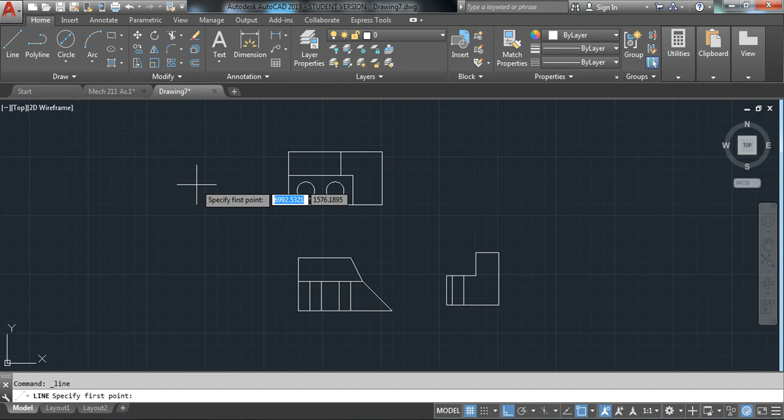To do this, I will start a line. To start a line you can just click here, or as a shortcut you can just do L on your keyboard, then space, and you're already in your command line. So I click here, I will go down 90 degrees.

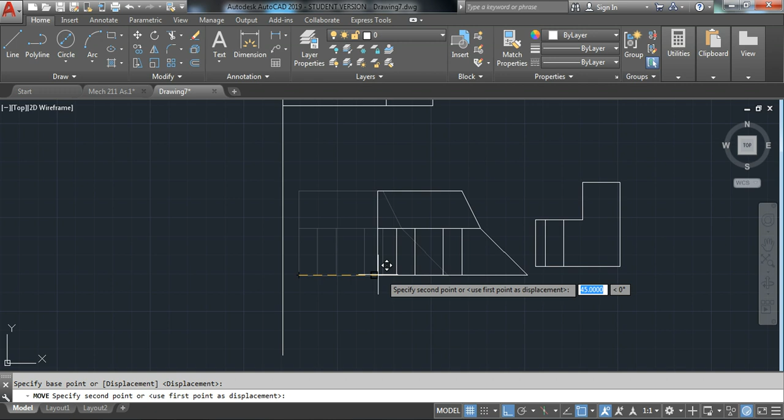Then I'll select my whole view and do right click, move. This is my base point. I will come straight using orthogonal mode on, then I'll put it here, and now I'll delete this line, and now my two views are aligned, and even here they are aligned. Okay, so they're aligned vertically together.

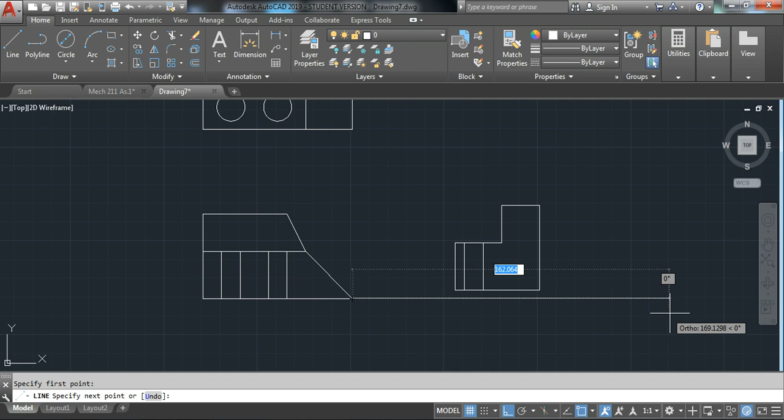Now these two views here, they're not aligned horizontally together. Same thing I'll do, L space, and now I'll start my line, stop it here, or do escape. Then I'll select my whole shape, I'll do right click, move, I'll choose any point, and I'll go down straight to this line. Okay, now they're both on the same line, aligned. Now I can remove my line.

Okay, so that was the first step to do. Check your alignment.

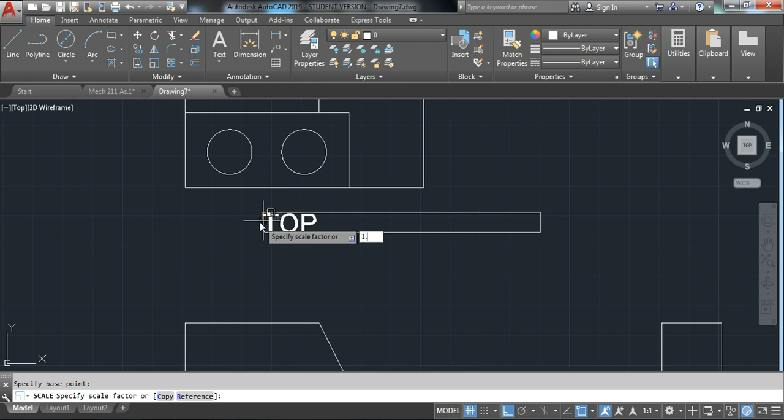If you want, you can just add here as the top view, scale it up, just like 1.5, or to be more specific, plan view, or plan.

Then do right click, copy, so you won't have to do it again. Then remove F8 and copy it here. I finished copying, I'll do escape.

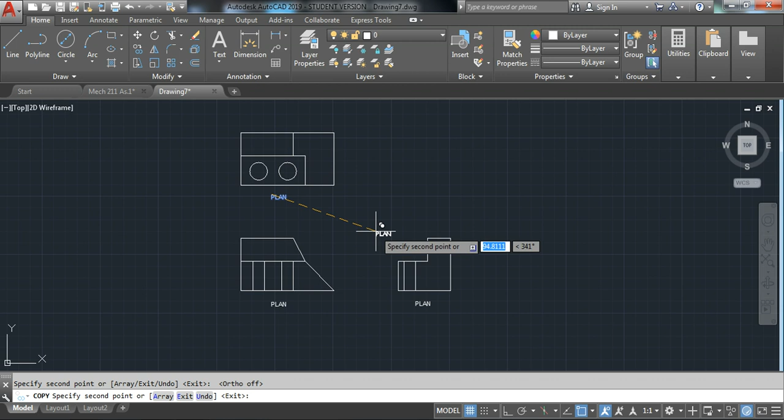Then I'll double click here, just as a front, and double click here, and I'll choose this as right side or side view. Okay, this is optional, but you can do it, it looks better.

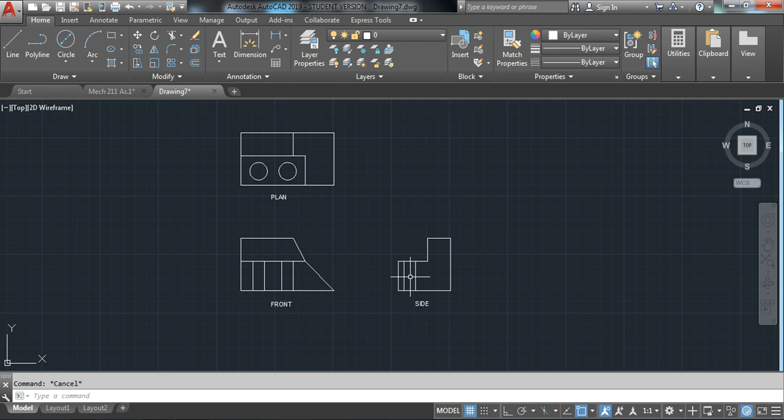So now you can see the student put these two circles. You can see their projection is here. So these are the two circles, but they are hidden here as hidden features, and then they appear here as a hidden feature too. But these two lines are now straight lines, and you want to make them hidden lines.

To do that, you come here near your match properties. You have on your property, it's the third rectangle, it's line type. You click on it, and you can see here in your lines library you don't have a dashed line.

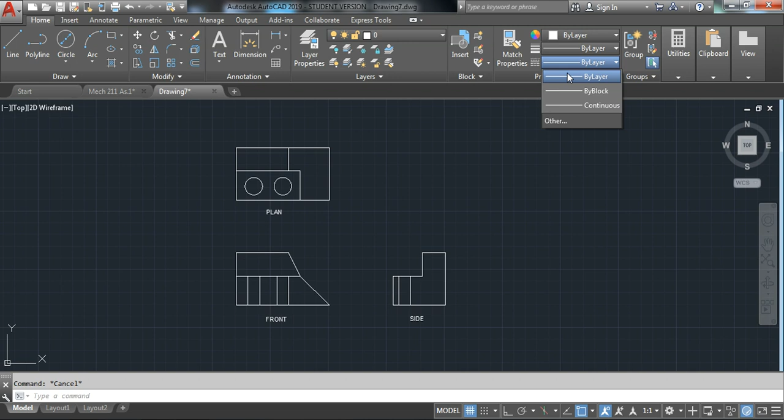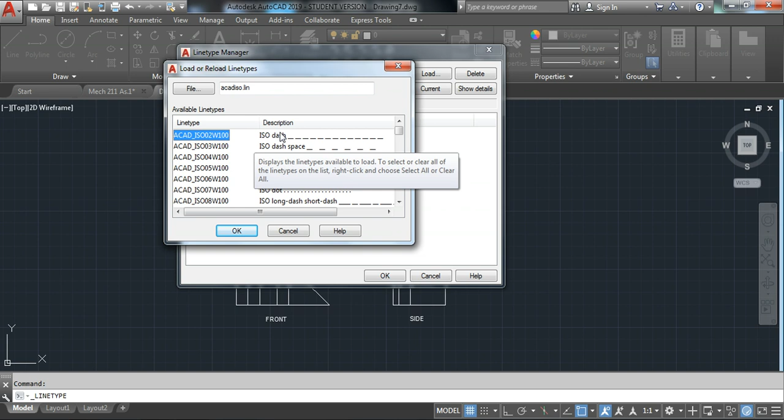So to add a dashed line, you can just click on other, then you click on load, because here on your library you have nothing. You click on load, and then you can choose ISO dash, because if you remember when you first started in the first video, you started as an ISO metric drawing, a metric drawing, like millimeters. If you started as inches, you go and choose dashed from here.

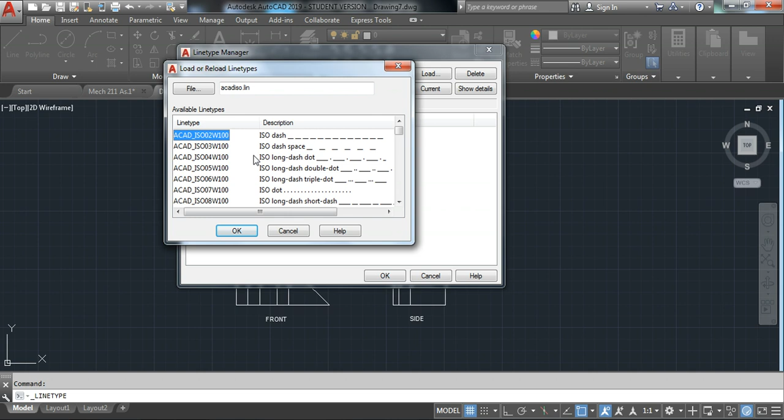This is imperial dashed line. If you want metric dashed line, you choose the ISO one. ISO means metric, so I'll choose this one. I will do OK, it's now in my library. I will do OK.

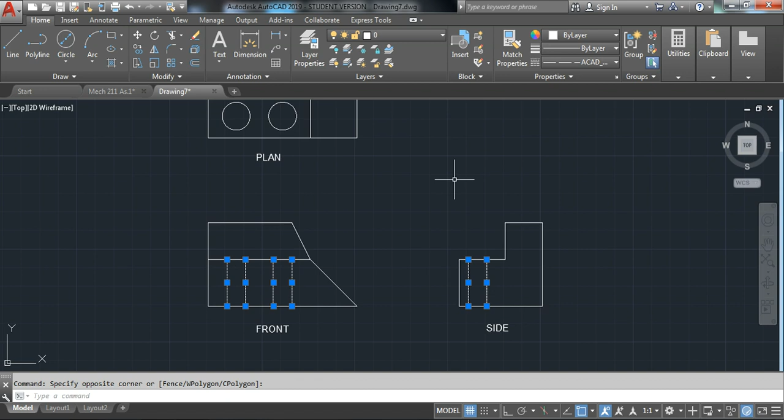Now I can go select my lines that I want to make dashed. And now I'll come here to the third one, and I will choose ACAD dashed line. I'll do escape, and now I have my lines dashed.

So look in here, let's say the dashes are too small and you want them bigger. So to make them bigger, or to change the scale of the dashes, I'll just do escape to clear everything.

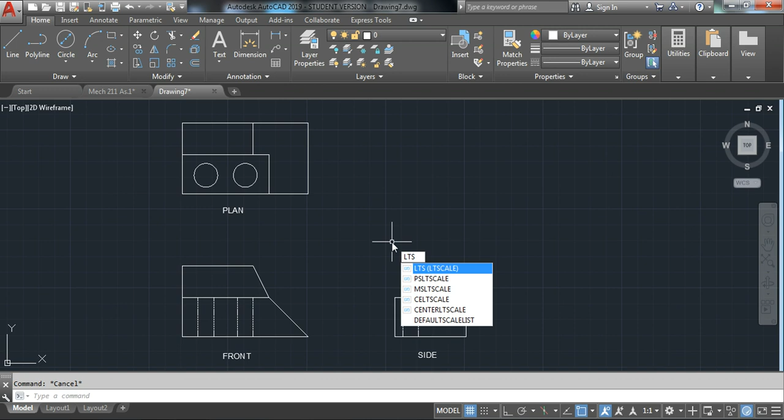Then you do LTS, you type it on your keyboard and press enter, and then you can see your scale by default is 1. So if you want the dashes to be bigger, for example, let's try 5, and you can see they're bigger now.

If you have the opposite case and want them smaller, again you type LTS, enter, and then you can choose, for example, 0.8. Now they are smaller than they were before. So I'll do Ctrl Z to keep the 5 because it looks good here in my view.

Okay, now whenever you have a circle or a cylinder, this circle will appear here as a cylindrical feature, because a circle in 3D space will become a cylinder if you project it down. Anyway, that's another topic.

You need a center line here, because if you don't have one, the person reading the drawing would think it's an edge. He'd think there's a hidden edge somewhere, or something is cut here, and that's why you have hidden lines. So to tell him that these hidden lines are actually for the circle, and to go to another view to see the circle when it's not hidden, you put a center line.

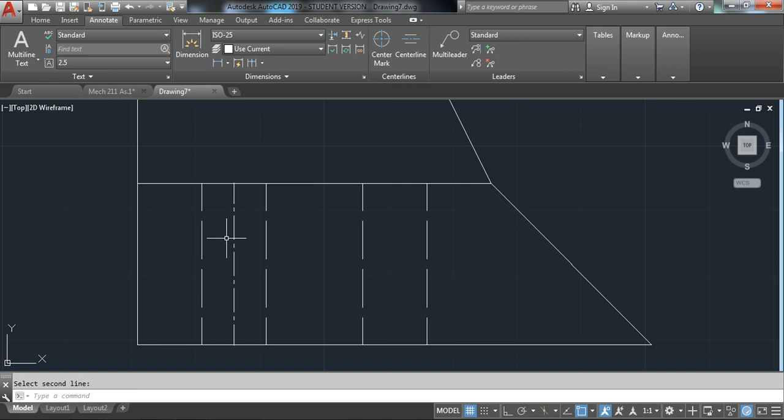To do that, go to the annotate tab, and you'll see center line. Click on it, click your first line, then second line, and you'll have your center line. It's automatically changed to a center line, not a continuous line, so you don't have to select it and change anything, because it's done automatically.

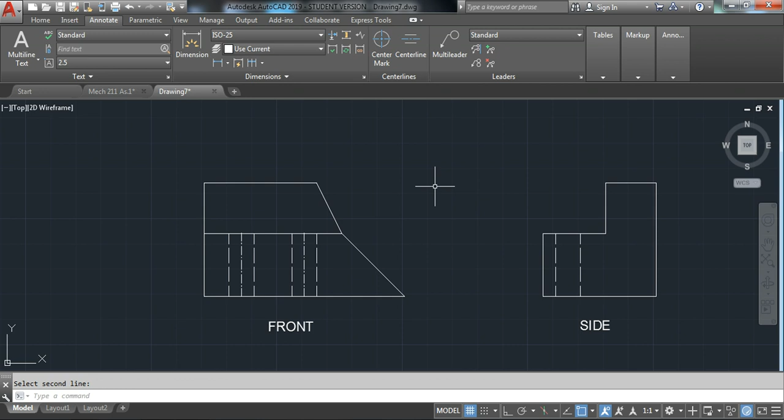Do it again for the other circles. I'll go to annotate, center line, first point, second point, then I have it. As we said, you can press space to repeat the previous command. First line, second line, and then I have my center lines.

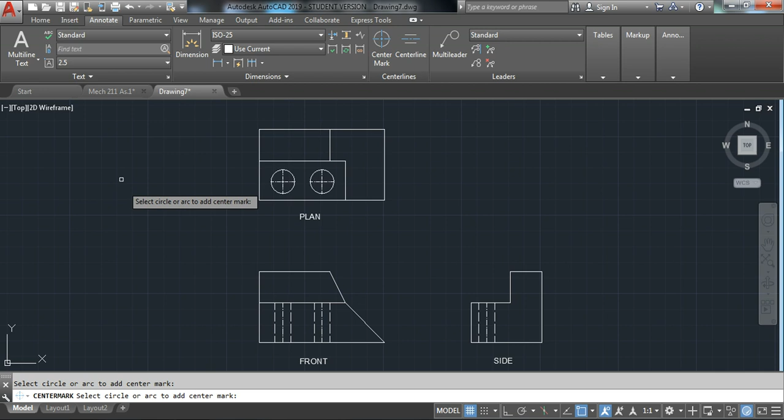Now on the circles I need the center mark. I click on center mark, click my circle, second circle, I'm finished, no more circles, so I do escape, and now I have my center marks. So now my drawing looks better, it's only missing the dimensions.

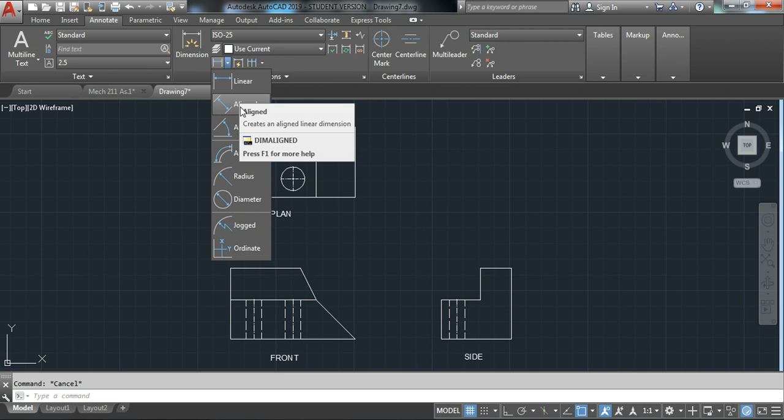To dimension, from the annotate tab you have the automatic dimension, but it's a bit tricky, so you can just choose each dimension by itself: linear, aligned for inclined lines, angular for angles, and radius and diameter for circles.

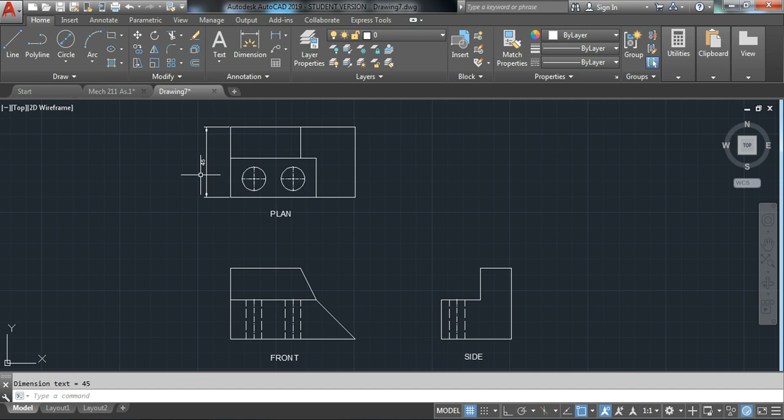Or you can come into the home tab. If you didn't go to annotate before, you can dimension from here. Linear is for horizontal or vertical dimensions you want to add, x and y. I click once on linear, then click this point, click my other point, go right, click here, and you have your dimension. So from this point to this point, this line is 45 millimeters.

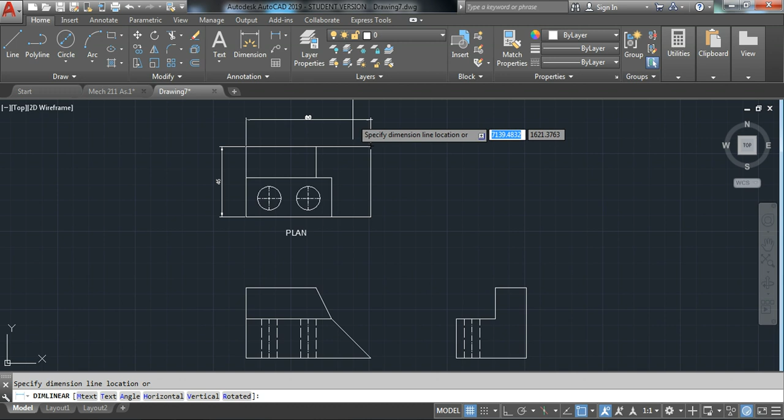So this is for vertical dimension. Same thing if you want to do it for horizontal dimension: you click on linear, first point, second point, go up, click, and then you have your dimension.

Let's say your dimensions are too small and you want them bigger, or you want to change their colors or anything. We have a command for that, called dim style, dimension style. You just type dim style on your keyboard, or you can type it as DIMSTY, then click enter, and you can see here you're using the ISO-25. Just keep it, and then do modify.

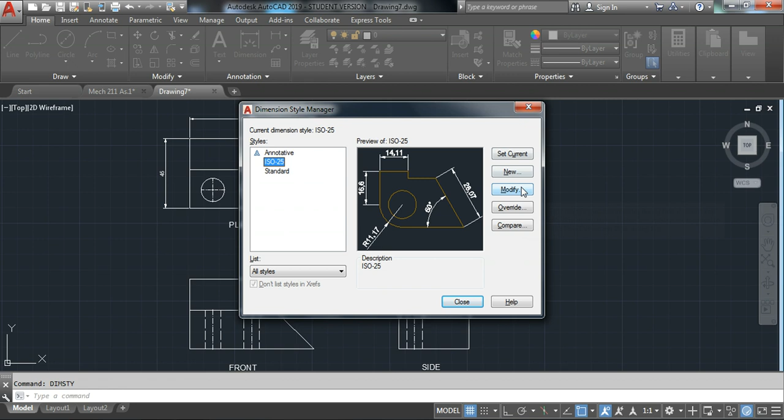Here you can change anything you want: the color, fill color, text height. To change the size of the dimension numbers, you change your text height. Let's say I put it to 4 and enter. You can see a preview of how big they'll become. I'll put it back to, let's say, 3 is good.

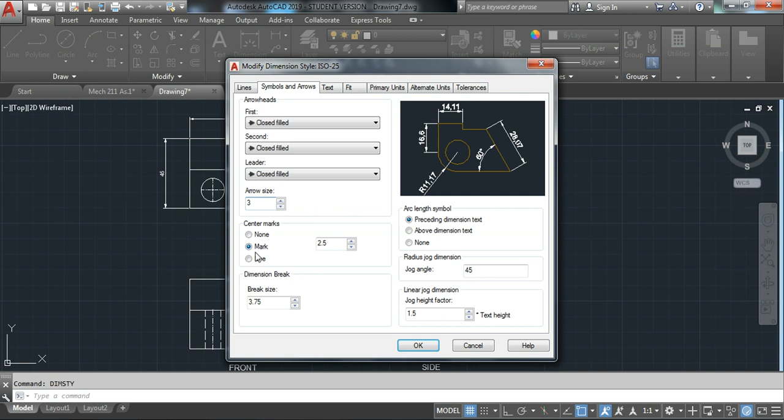Don't forget, when you change your text height, it's nice to change your arrow size too, to the same size. It looks nice, so put it to 3 here, and here you can change your center marks if you want, like the break size. Try changing all these settings and see what they do, but the most important ones now are the text height and the arrow size. So we change them, do OK.

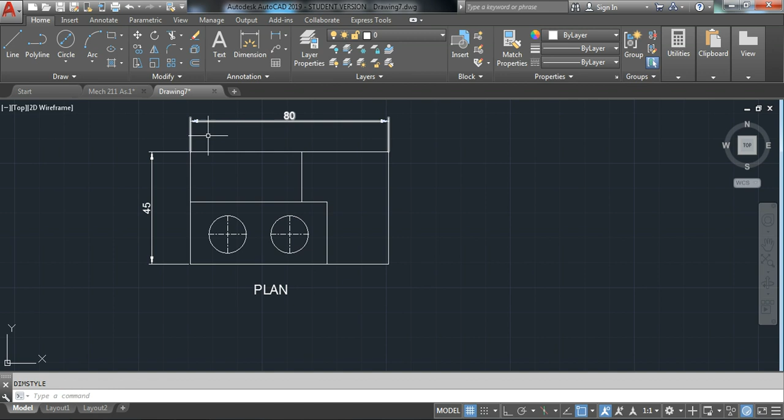Then do close, and they are automatically changed for all dimensions. Okay, I'll do dim style again, enter. Let's say I want to change my color, modify, text color, I'll choose red, and the fill color I'll choose red too. Oh no, sorry, I'll keep it as by layer. The color of my dimension I put to red, and the color of my extension to red, and now it's all red. That's one way to change the color of your dimension.

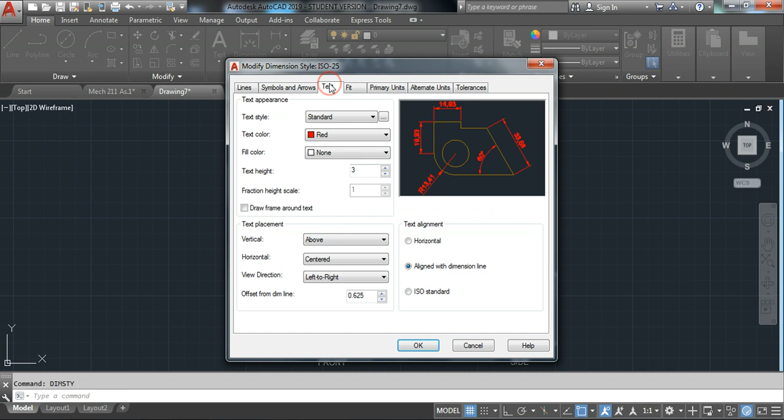It took longer than expected. But another way to change it, you can just do Ctrl Z. Now you can just click on them, go to layer here, and you can change their colors.

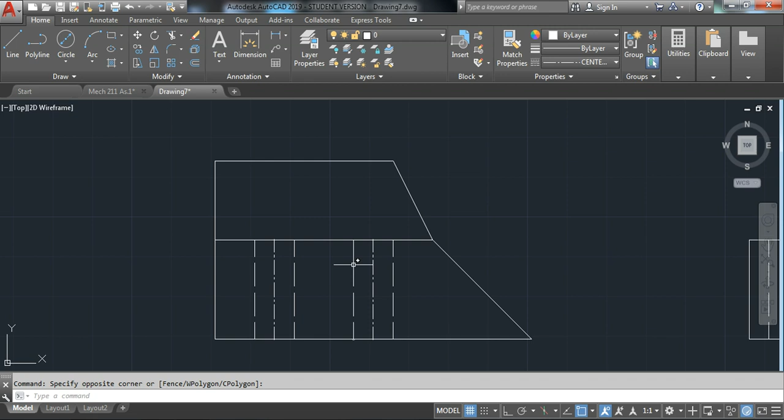Let's change it. It's nice too if you want to change the color for the center lines, the center marks, because actually they don't belong to the drawing. So it's always good to give different colors for annotation things, and keep the main color for the main shape.

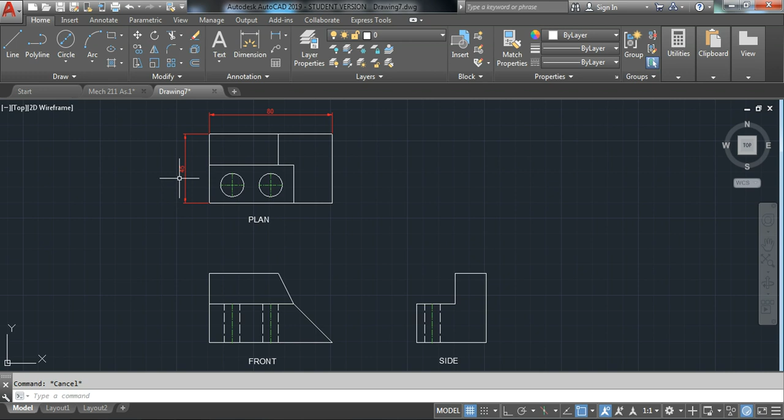Like for lines that are actually on the drawing. So that's one thing, to change the colors, to change the size of your dimension, to change the scale of your dim style. To change your size, you go to modify, text, and arrow, and as we said, you do LTS to change the dashes here.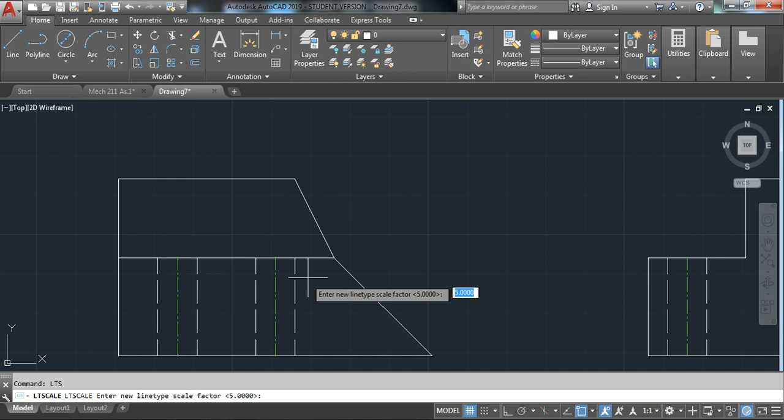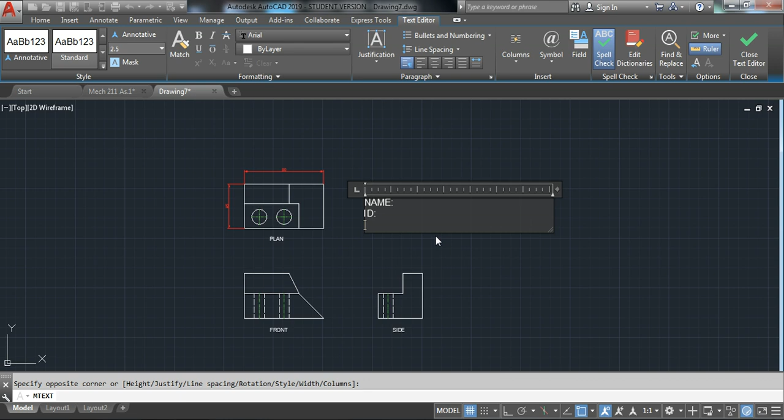And what else we want to do? So let's say that's your drawing, you finished it, you want to submit it. Before that, I'll just do text. First corner, second corner, I'll just type name, ID, section. Then I press outside, click on them, right click, scale, 2, enter, then I have them.

Let's say you finish your drawing, now you want to print it. Let's say you want to print it to scale. You can see here your scale is 1:1. That's your drawing space scale. Actually, you have here layout. So here I'm in my model, I'm in my workspace, right?

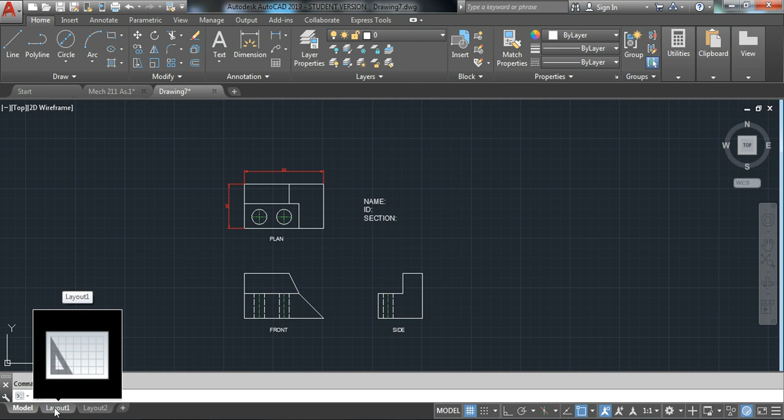When you want to print things, you go to your layout. So I'll click on layout, and then you can see here my workspace, and it's inside like a paper shape. So if I click here on the border, not inside, on the border here, and try to move these points. So if I press F8 now, it's hard to move the point. So if you encounter this problem, just press F8 so your mouse will be free.

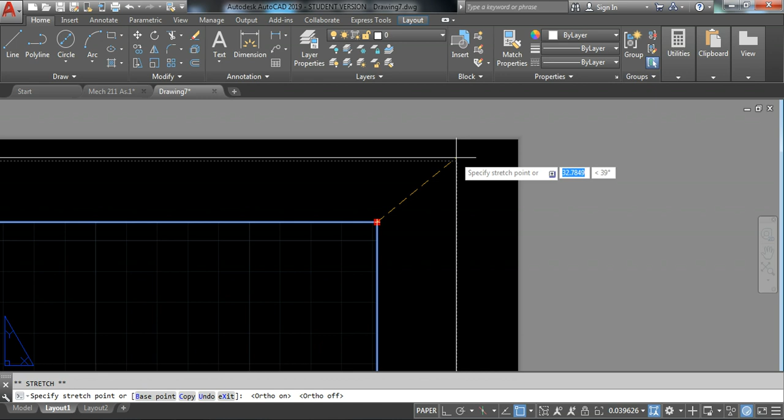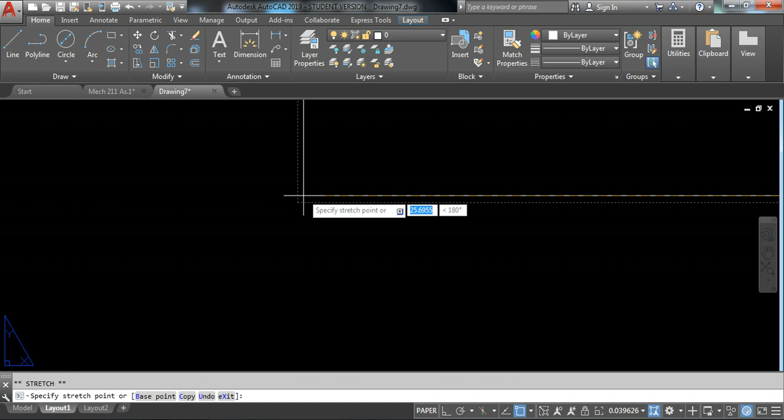Now come and try to match it as good as possible to this dotted line. Do it for all 4 edges. Okay, same thing for here. Again, there may be a faster way to do it. I'm just showing you a way that works. If there's a faster way, do it, good for you.

Okay, so now I'm actually around my dash line. So now you can see my drawing is here. You can see it is too small, and I want it to be like, so that's a preview of your printed drawing. Okay, so if you print it like this now, you will see this shape, nothing is visible.

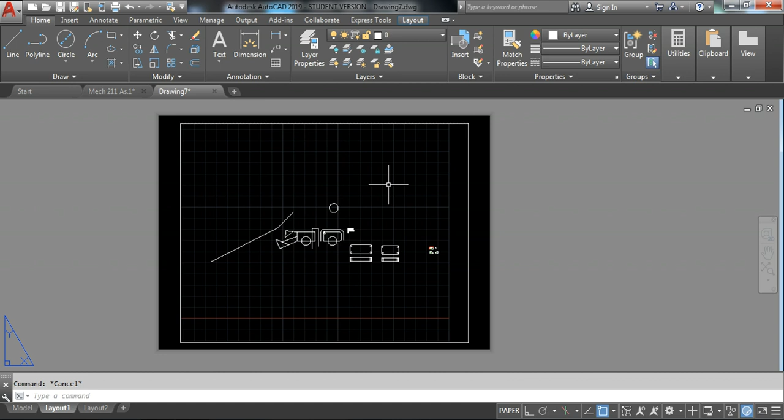So I'll do double click inside here, and now I'm inside my drawing, inside my model space. You can see here it's model. Before I clicked, it was paper space. So now here I'm in paper space. Wherever I move, wherever I do, wherever you draw, even if you want to draw, it's not inside your workspace.

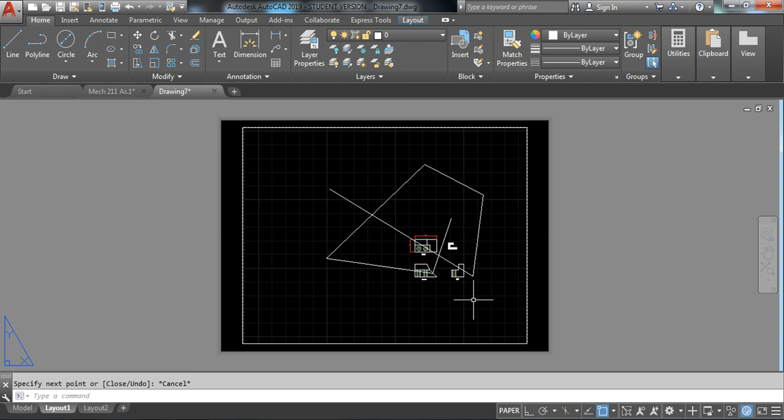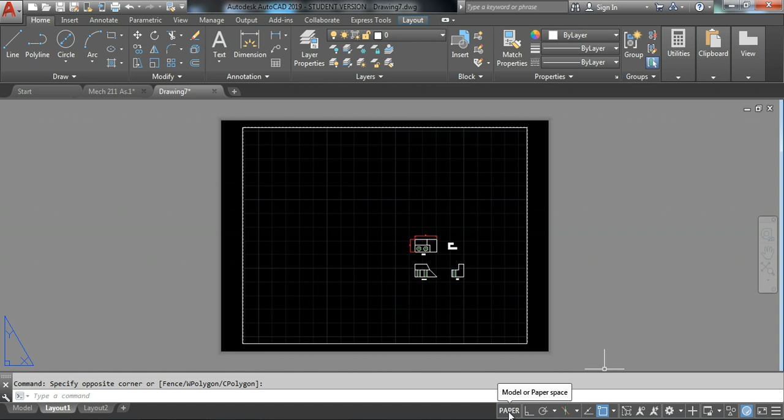If I go here to model, you see you have nothing drawn, but if you go to layout, it's drawn here. So I'll just remove them. Even if you want to select, because you are here in paper space, you're not selecting anything. So again, I'll press on paper. Now I'm switched to my model space.

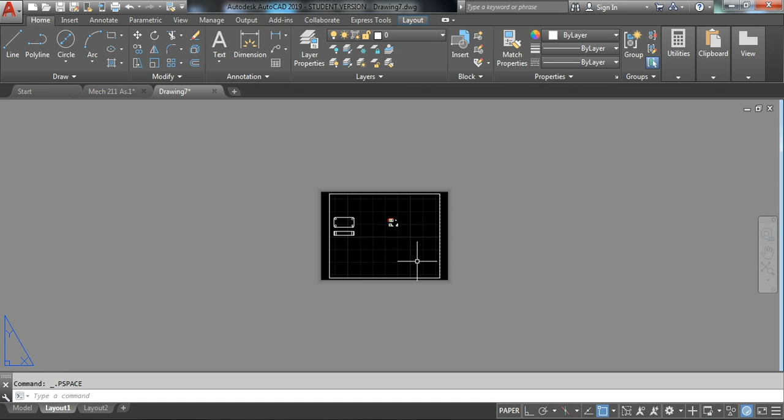Okay, this is very important. I hope I explained it well. So model, paper, you're now in paper. Now click on paper, you're in model. Okay, so now my paper zoom is too far, so I click on model. I'm again in paper. I'll zoom it to a good view. Then I press on paper to go to model.

Now, okay, let's say that's good for me. You can see here your scale is 2.5 something, and actually if you click on this arrow, you can see you have specific scales. I want you to choose one of them. So first start 1 to 1. It's good.

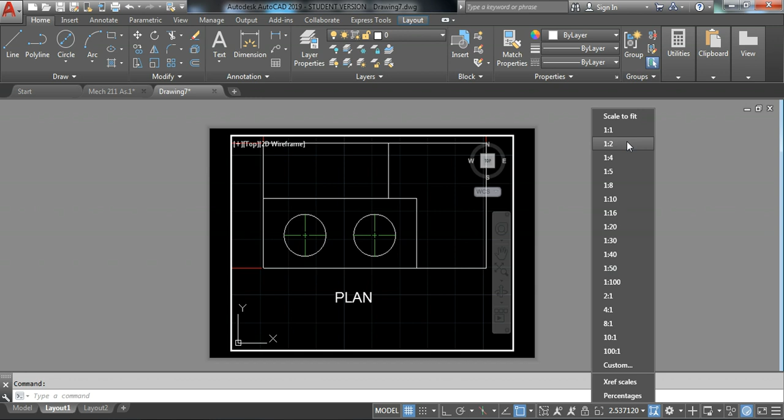Sometimes when you choose 1 to 1, you will get this. So just you can choose 1 to 2, and you get this is too far. So just choose 1 to 1. Move your drawing to a good view. Okay, that's good. Your scale is 1 to 1. You can now switch to paper space, and that would be what your drawing will look like actually. And when you print it, you will get, when you measure here, you will get 45 millimeters. It's 45 millimeters actually on your drawing, because here your scale is 1 to 1.

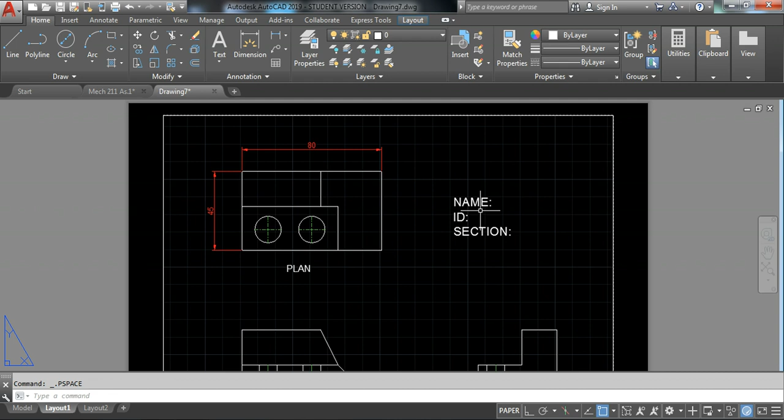Now let's say you did this, everything's fine. You want to add your name. You can just go without messing with your paper space. Just go to model. Now you can do whatever you want. Even you can change lines wherever you want. Name. Add my name, for example. Okay, finish editing. You can go to layout, and it's already done for you.

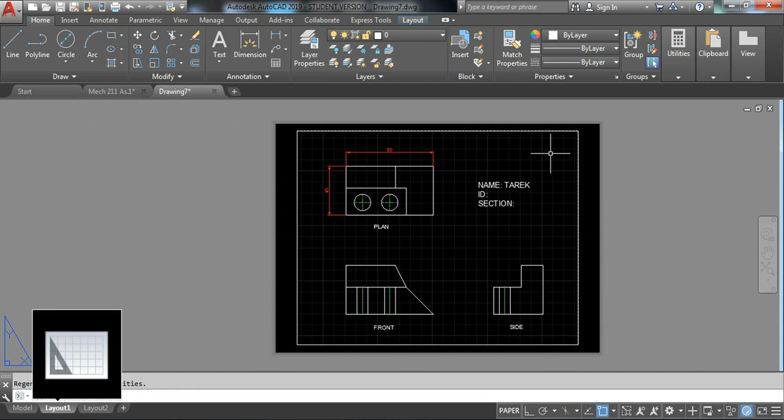So now to print it, you can press print here on this little printer, or you can do Ctrl P on your keyboard. If you get this, just do continue to single sheet.

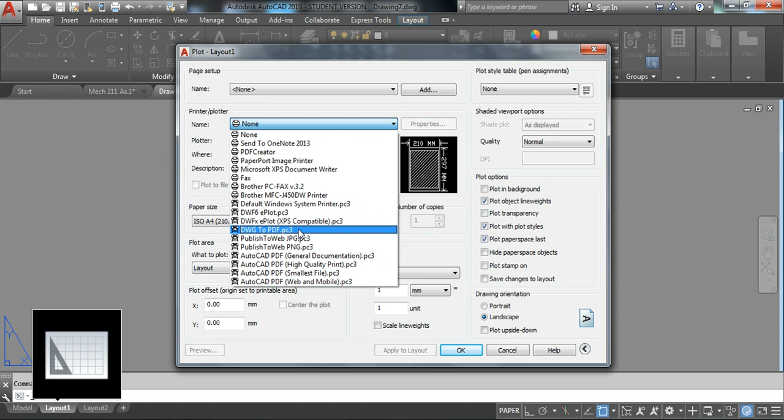You'll get this dialog box. On printer plotter, choose - if you want to go to as a PDF, you click on this DWG to PDF. If not, you can choose your printer. So it doesn't matter, whether you choose DWG to PDF or your printer, then you can continue, it's the same.

For paper size, I prefer for drawing, for PDF, or for your printer, just choose the letter size, which is 8.5 by 11. That's the size we'll use every time, okay?

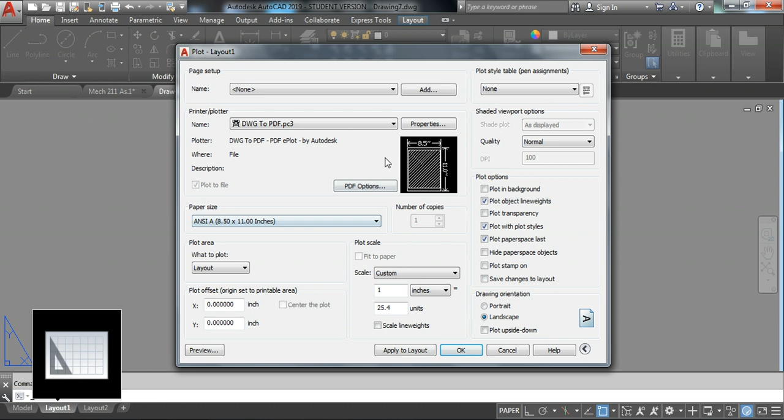And now you come to what to plot. It's asking you what to plot, so I'll choose window, and then it will take me here to choose my window. So I'll come here and I'll choose the corner and the other corner.

I'll do center the plot, I'll check this one, and I'll list this for my scale. I'll do 1 to 1. This is in millimeters, 1 to 1.

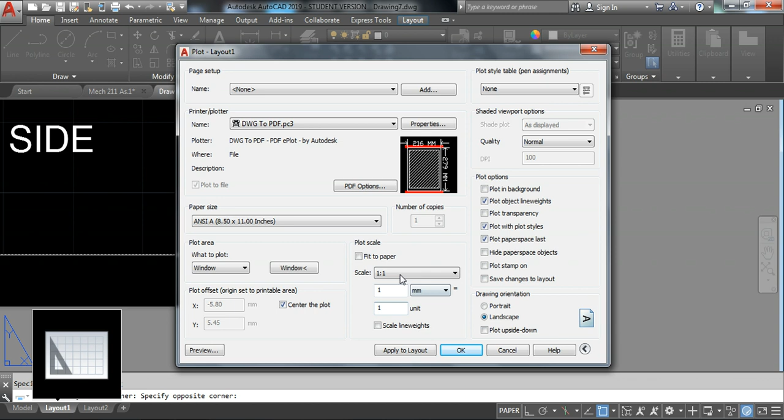And then I'll do preview, and you can see your drawing. You may not have this produced by student version - doesn't matter - but you can see your drawing is good.

If it's good, you can just press on plot, and then it will take you to this dialog box to save it. You can save it anywhere you want, so you can email it to me, and you can choose your name.

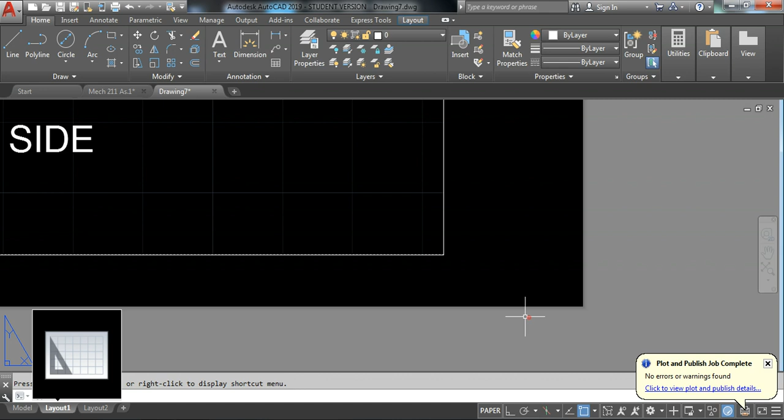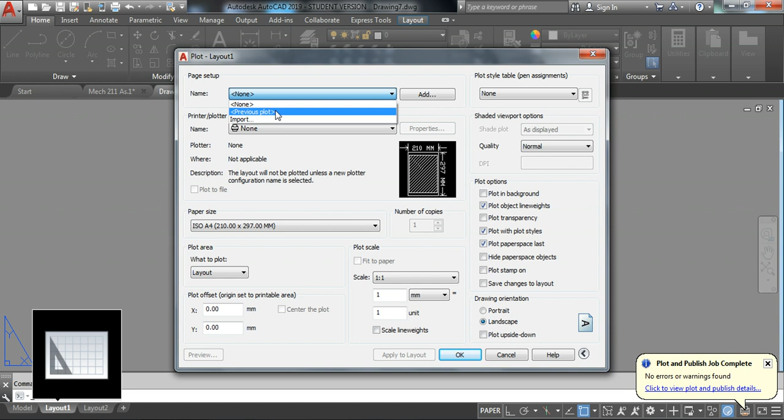If you do cancel, I'll do Ctrl P or print again - let's say you went out to change something, then you went back to your printing and you don't want to put your settings again. You can just click here on page setup and do previous plot, and you have your previous settings here. That's easier and faster.

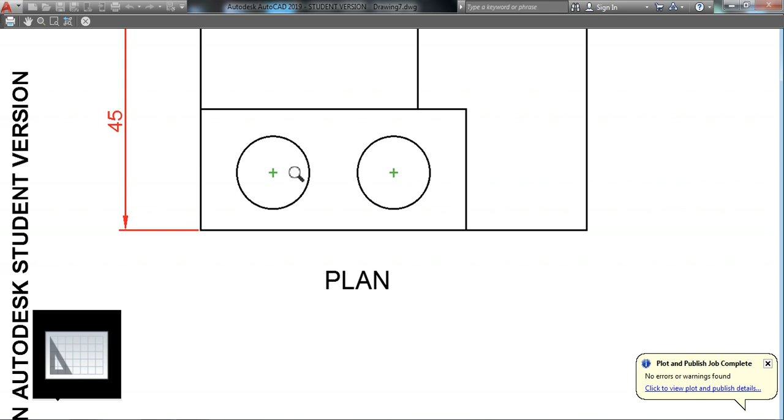Let's say you want to print it without colors, because for the hard copy I don't need colors, so you can just choose grayscale or monochrome. If you do this and you do preview, it's actually now with colors, but when you print it you see no colors.

So if you see something and you need to change something, instead of pressing on plot, you can do escape on your keyboard or close the preview, and you're back here to change your settings.

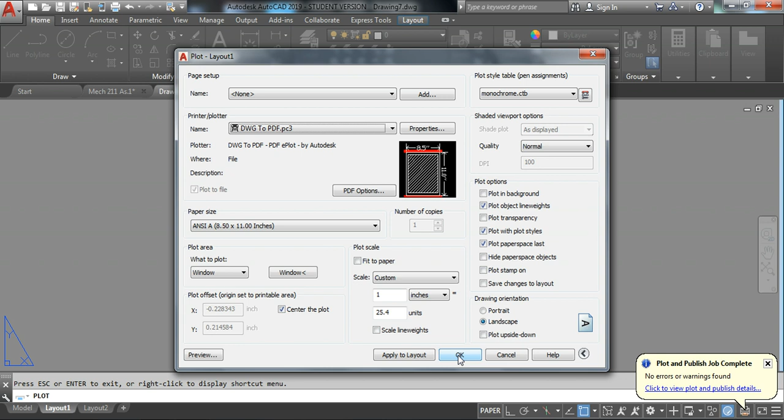Do OK, desktop, and I will save it, for example. Now that's a preview of what I saved. Close it. Okay, so that's one way to print your drawing.

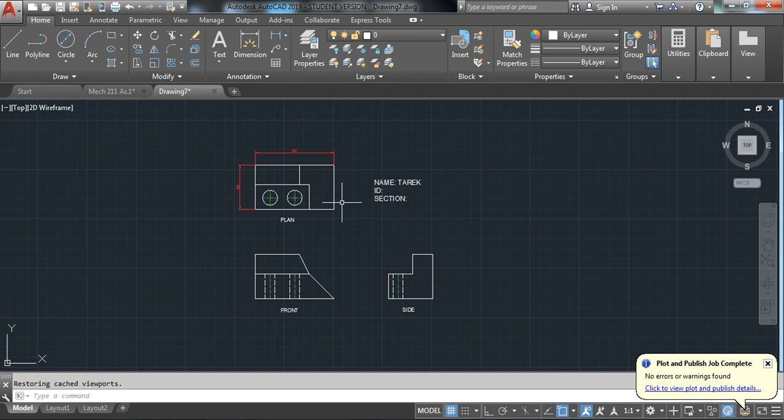Another quick way to print it: you can come to model, you can do print here, then you can choose your window. I did the previous plot - you can just do the same as we did before, PDF, 8.5 by 11. Then, instead of here, when you choose your window, press here on window, then you can choose one corner, other corner.

If you do preview, you can see your drawing, but the thing here is your scale is not 1 to 1. It's 1 to 1 here on your drawing space, but when you print, Ctrl P, previous plot, when you see here, your scale is not 1 to 1. You can change it to 1 to 1 if you move off fit to paper.

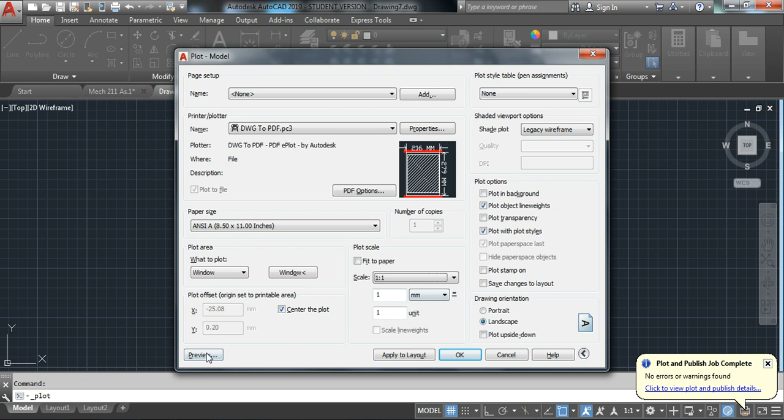You do 1 to 1. I put millimeters because my units are in millimeters. 1 to 1 again till I get 1 to 1 in millimeters. Then I'll do preview, and you can do it.

So you can use both ways, as long as you have 1 to 1, or 1 to 2, for example, for your scale. So as long as you have a known scale here, you can print from wherever you want, from your layout or from your model.

But if you do fit to paper and you see a messed up scale here, like 1 point something, or 2 point 57 for example, that's wrong - well, not wrong, but we just want a specific scale.